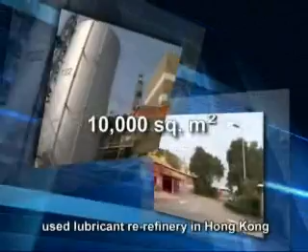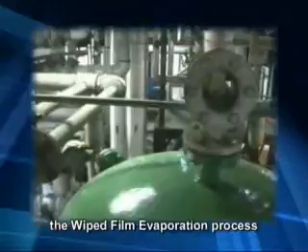In 1993, Dunwell acquired and restructured a 10,000 square meters used lubricant re-refinery in Hong Kong. With continuous effort in technological upgrades and implementing innovative business strategies, Dunwell manages to collect and treat more than 85% of used lubricants generated in Hong Kong. By improving the wiped film evaporation process, Dunwell is capable of recycling up to 400,000 gallons of used lubricants per month. And Dunwell has been recognized with many awards for its contribution to society and the environment.

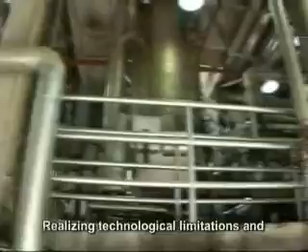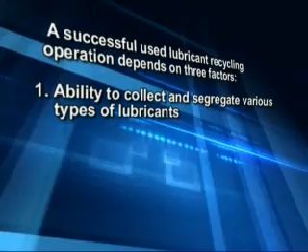Realizing technological limitations and high operating costs in distillation, Dunwell has been exploring and developing alternative technologies from the world since 1996. Today, Dunwell has successfully transformed a vibrating membrane mechanism and developed the world's first VMAT used lubricants recycling technology. A successful used lubricant recycling operation depends on three factors. Firstly, the ability to collect and segregate various types of lubricants. Secondly, efficient and cost-effective technologies available. And thirdly, the ability to market the recycled lubricant products.

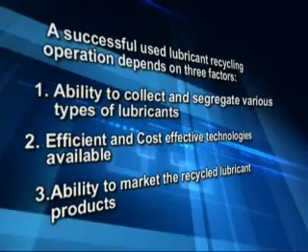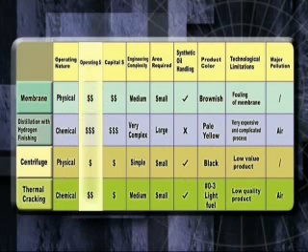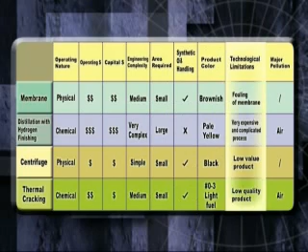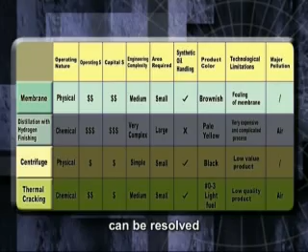In considering various recycling technologies available worldwide, such as membrane filtration, distillation with hydrogen finishing, centrifuge, thermal cracking, etc., one has to consider the operating costs, capital investment, engineering complexity, the area required, the ability to handle synthetic-based lubricants, product color, technological limitations, and secondary pollution. Amongst these options, membrane filtration is a relatively simple and cost-effective solution, as long as its inherent fouling issue can be resolved. As the contaminant within used lubricants is of relatively large amounts of particles, and the lubricant is viscous in nature, conventional cross-flow membrane technology has the membrane fouling problem.

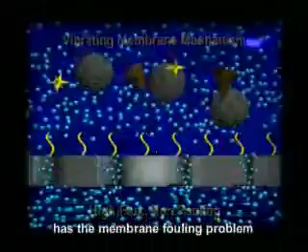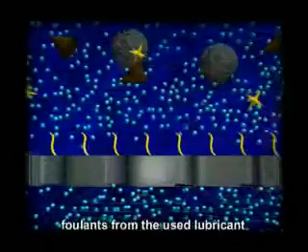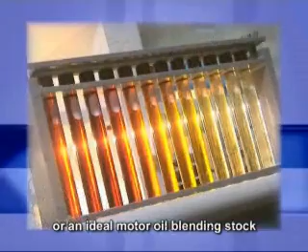By adopting VMAT's vibratory shear enhanced process, the intense shear waves generated along the membrane surface repel solids and foulants from the used lubricant and allow clear oil to flow through the membrane pores continuously in just a single pass. This light brown clear oil is a quality fuel oil or an ideal motor oil blending stock for engine lubricants when blended with suitable additive packages.

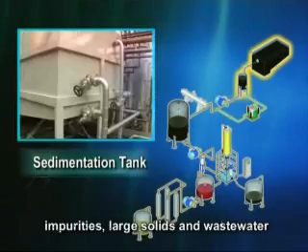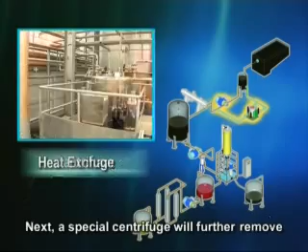Used lubricant is first stored in the sedimentation tank for preliminary removal of impurities, large solids and wastewater. The heat exchanger increases the temperature of the used lubricant to a maximum of 90 degrees centigrade. Next, a special centrifuge will further remove the viscous material and solid particles. Then the used lubricant will enter the vibrating membrane unit. With just a single pass through the membrane, the used lubricant is filtered into clear oil, which can be decolored through the automatic regenerative clay system to attain a good color of the base oil.

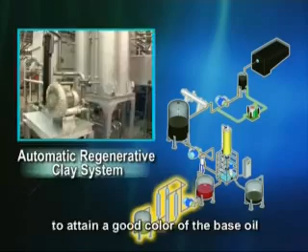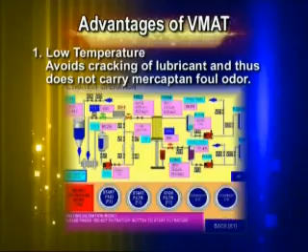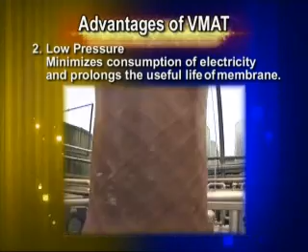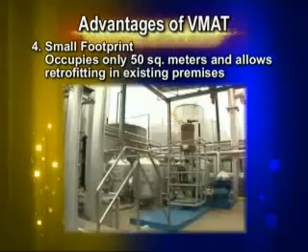Through the programmable logic control PLC system, VMAT can be accessed, controlled and monitored through the internet by this remote support system. Advantages of VMAT: 1. Low temperature. Avoids cracking of lubricant and thus does not carry mercaptan foul odor. 2. Low pressure. Minimizes consumption of electricity and prolongs the useful life of the membrane. 3. Synthetic lubricant. VMAT is capable of handling synthetic-based lubricant that is not preferred by distillation technologies. 4. Small footprint. Occupies only 50 square meters and allows retrofitting in existing premises. And 5. Low cost. Return on investment can be less than 2 years.

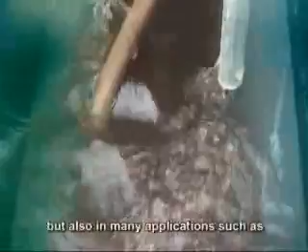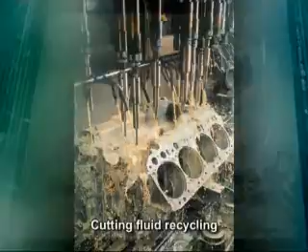Dunwell's green lubricant is now being supplied to the Hong Kong government, construction industries and utility companies, manufacturers and overseas clients. Behind the successful development of the VMAT system is a strong engineering team, equipped with solid experience in the used lubricant recycling area and powered by strong enthusiasm towards technology advancement. Dunwell's vibrating membrane technology can be applied not only on used lubricant recycling, but also in many applications, such as wastewater treatment, MBR for municipal and poultry wastewater treatment, various chemical recovery, cutting fluid recycling, treatment of landfill leachate, and the filtration of produced water from oil fields.

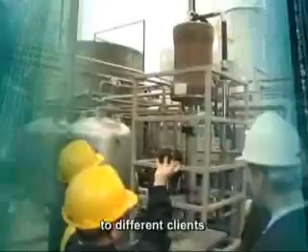With over 13 years' experience, Dunwell is geared to provide a commercially sensible and technologically effective solution to different clients. On February the 27th, 2006, Dunwell's VMAT system received the Grand Award from the Hong Kong Awards for Industry, Machinery and Equipment Design category. This is the most prestigious award in Hong Kong, recognizing outstanding industrial product design, and is presented by the Chief Executive of the Hong Kong Special Administrative Region Government. We sincerely look forward to developing our environmental enterprise with overseas partners. So let's join hands to create a better environment for our future.